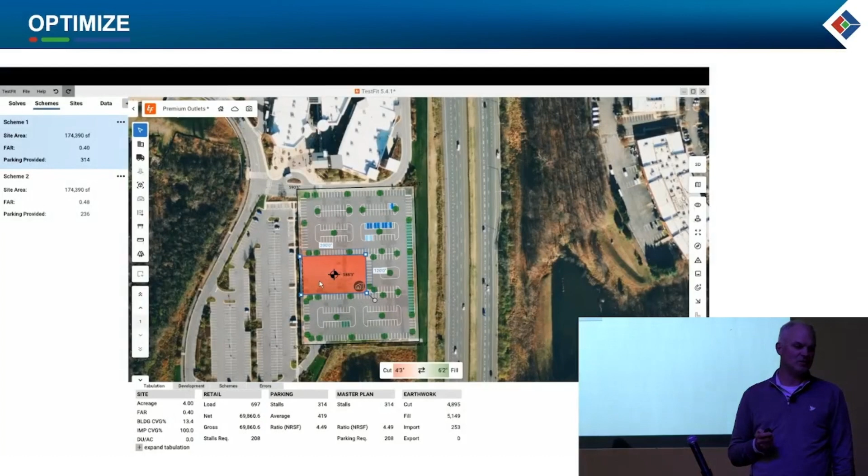So we're here to talk about automation in the design process, and I'm going to go through three phases of it. Early in a project we talk a lot about optimization and what are some of those tools we use. This is a tool we use for site planning, where you can move the building around early in a project and really start to explore in real time with the client and owner what the options are, what it looks like if we add another building to that site.

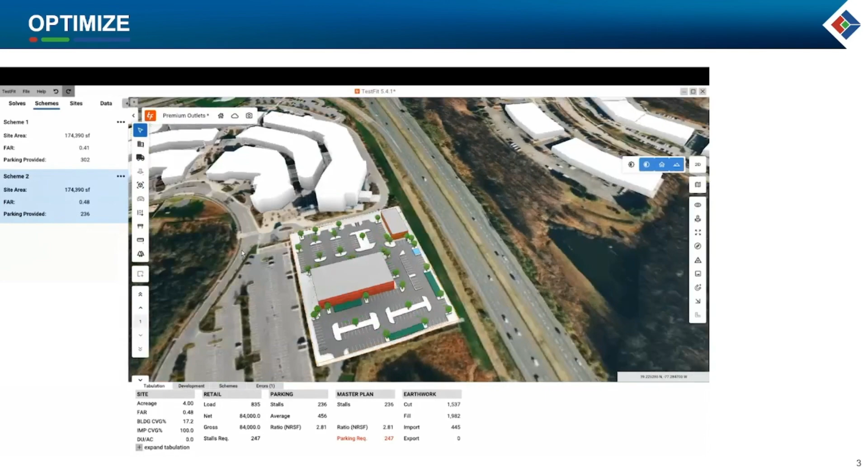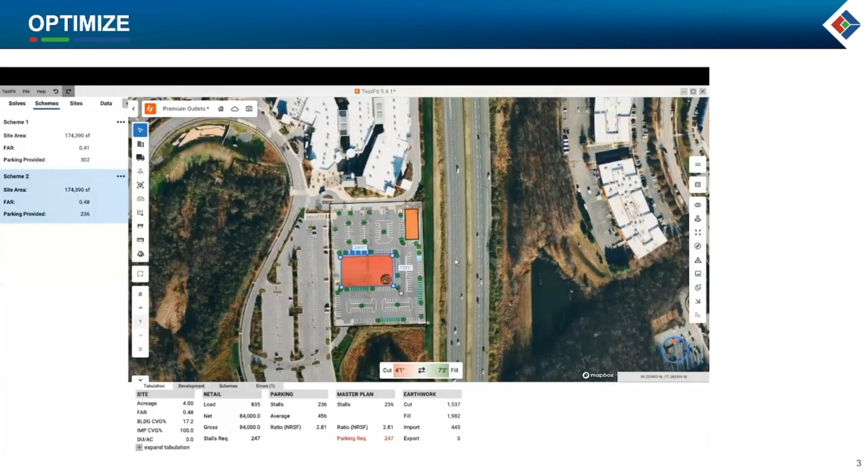I think the theme would be, with all the tools we have for automation, it's just easier for us now early on in the project to provide feedback and information to folks so we can make better decisions.

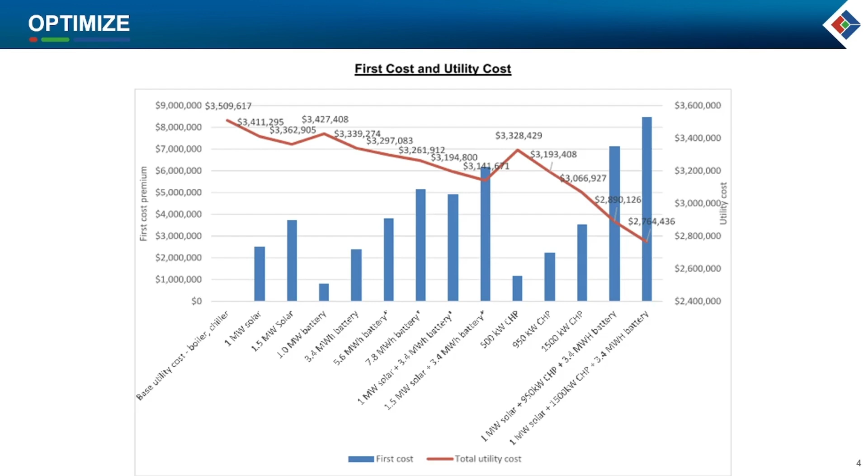This is another one. I tell people this is a less exciting automation tool, but this is when we look at energy sources for buildings or for a campus. This program takes it and puts a ton of different options together, thousands of different combinations, then gives you the 10 or 20 best. Sometimes it comes up with ones you might not have considered. It's not as nice to look at as some of the generative AI things, but it gives you a really good result, and once again it gives you that information early on to make good decisions.

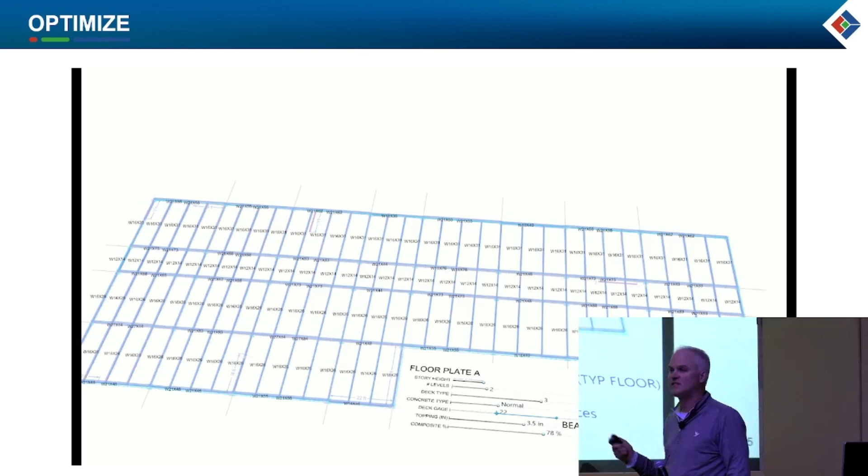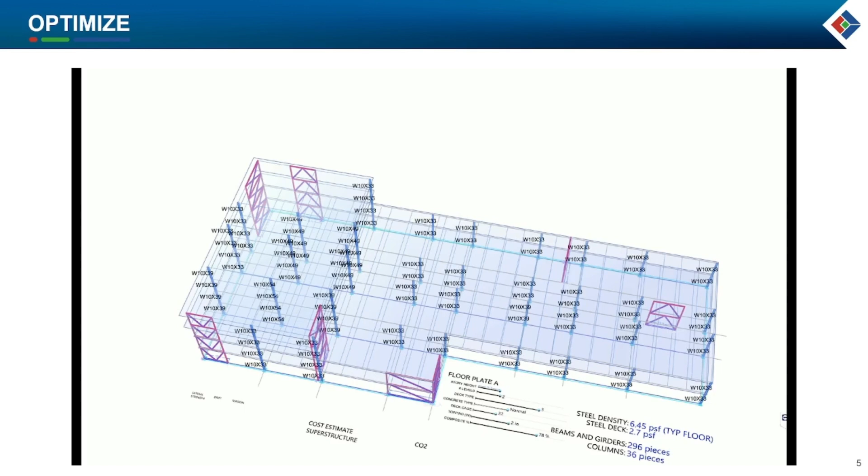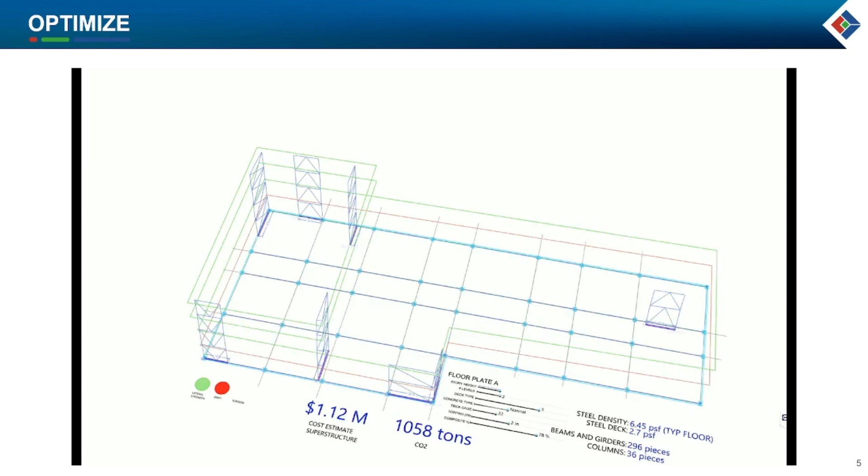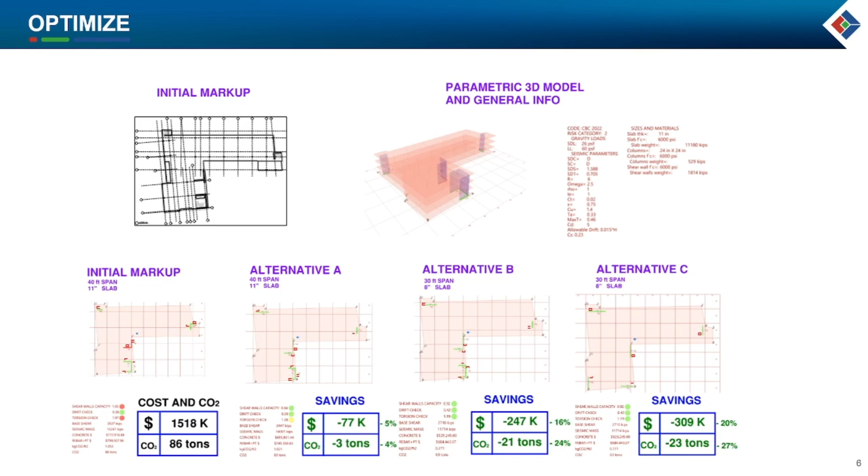From the structural side of things, as we get into projects there's a lot of questions on how do we arrange things, what's going to be the best and most optimized solution. As a theme, our industry—and I've been with IMEG for 25 years—I think a lot of times we think about design as experience; the design you provide is really based on your experience. What I think as a group is we're headed more toward data-driven design. You can't optimize your experiential design capabilities, but if we use data, then we can.

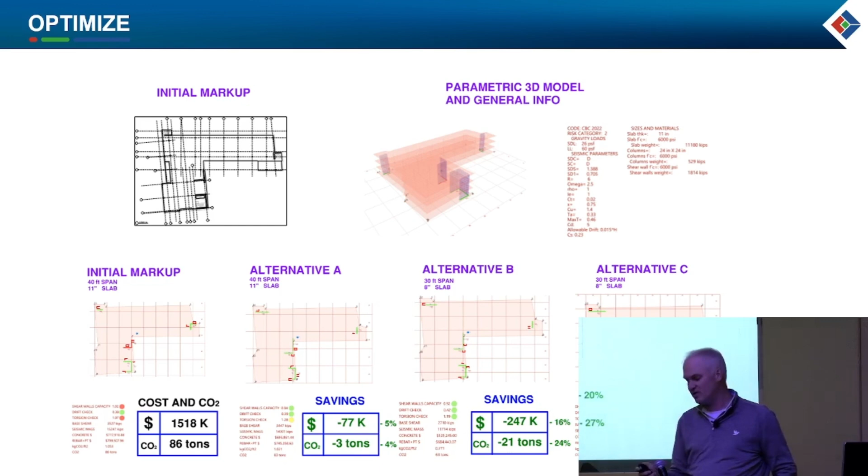The whole goal of that tool I showed before is to move things around and allow you to see what that impact is. But then ultimately it's to look at how much steel is in the building, how we can optimize that building and make good decisions. Some people are interested in cost, some are more interested in carbon, but they go together—if you use less material, it usually costs less, and there's also less of a carbon footprint. This is available on our website.

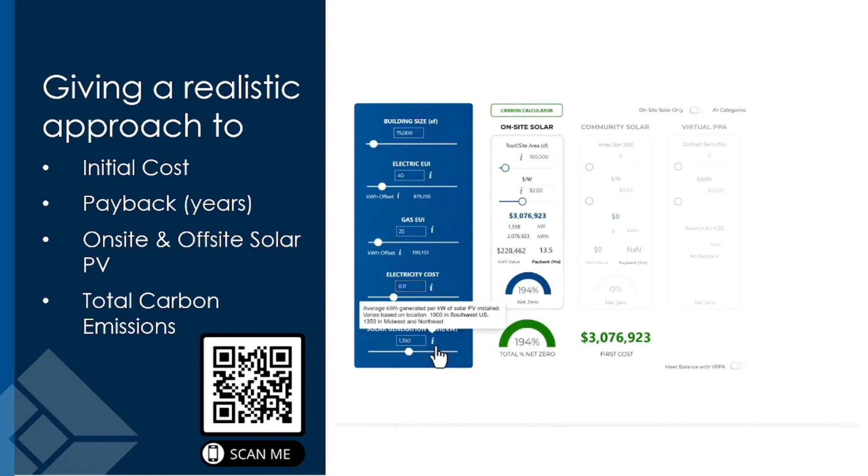We had a lot of people asking, I want my building to be net zero, so we put a tool together. It's simple, but you can put in the size of your building, and we give you some guidance on how much energy it might use. One of the questions that always comes up is, what if I put solar on my roof? Can I be net zero? This gives you that answer pretty quickly.

The other part of it is on the cost side of things. Usually we're working as part of a team, and so this allows us sliders and input. You can adjust that price and see how it impacts the solution.

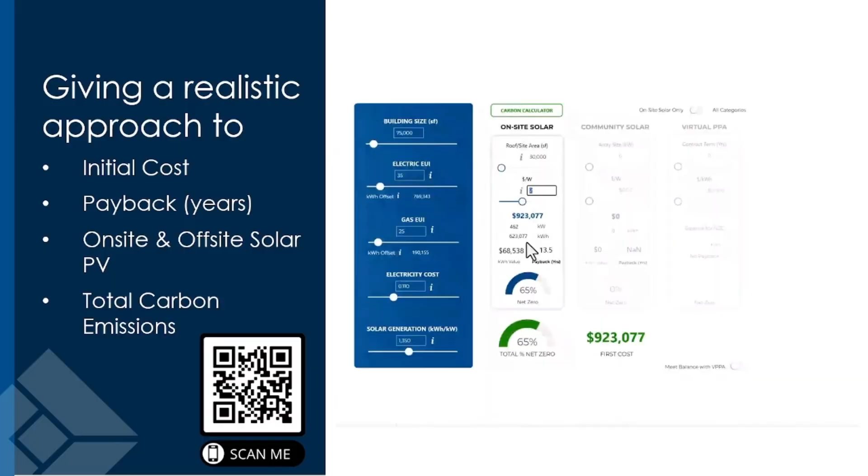The Inflation Reduction Act is another one of those tools where folks talk about it, but then when you get to their project, they want to know what this means in dollars for them. Once again, it's just a tool where we put some basic information on the systems they're considering, and we can give feedback on what money might be available, and maybe that changes the decision and direction they want to go.

So virtual reality, John and I had a little bit of a discussion on this. I think virtual reality, we've all seen it used on large projects, and if you used it five or more years ago, you may have had not a great experience. When we looked at virtual reality, we really look at it as, we want to use it on every project, all the time, every day, sort of a scenario. It's not something special, it's something we can do easily and all the time. And that's where it's really developed, the software, the hardware is really developed.

This is just an example of a project. It's a healthcare project. In this case, I think we had 65 clinicians that we put into the headsets so they could explore their patient room. Our goal for our team for 2024 was to have 1,000 virtual reality, augmented reality experiences. We ended up having 1,500 experiences for folks, so you get better, but also the reason we were able to do that was because there is just more automation. It's so much easier to take your model, put it into that environment, and then utilize it.

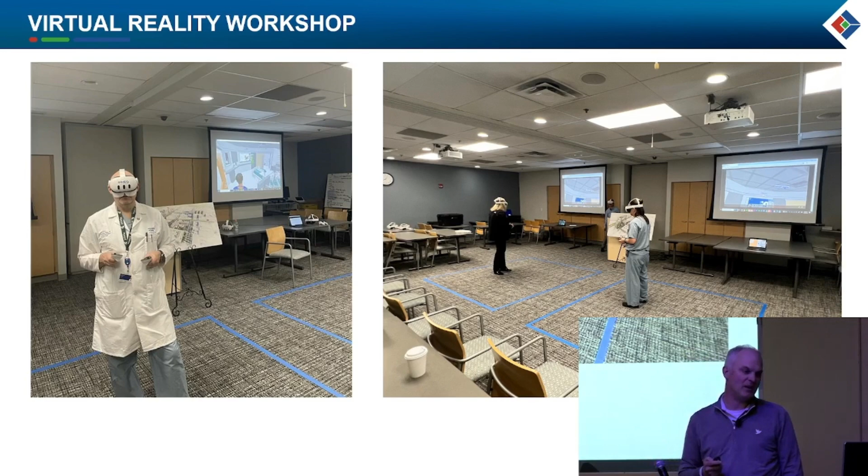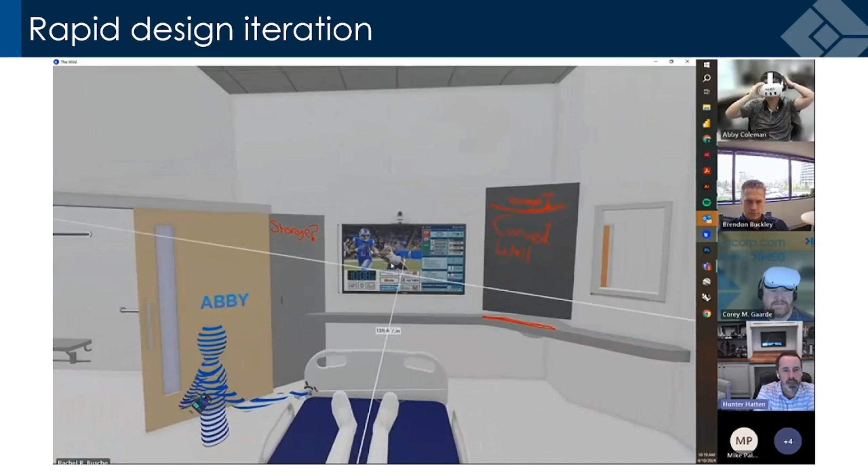When you think about all the data we have available to us, the 3D geometry of the building is the biggest data set for buildings that we do, and I don't think we always do a great job of visualizing that for people who aren't familiar, who aren't engineers. So this is an example where it's the classic question if you've done patient rooms: do you want one big monitor or do you want two smaller monitors?

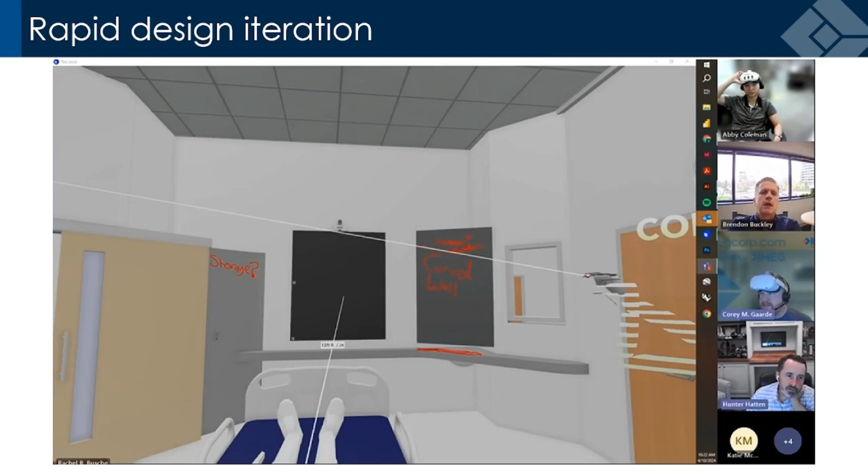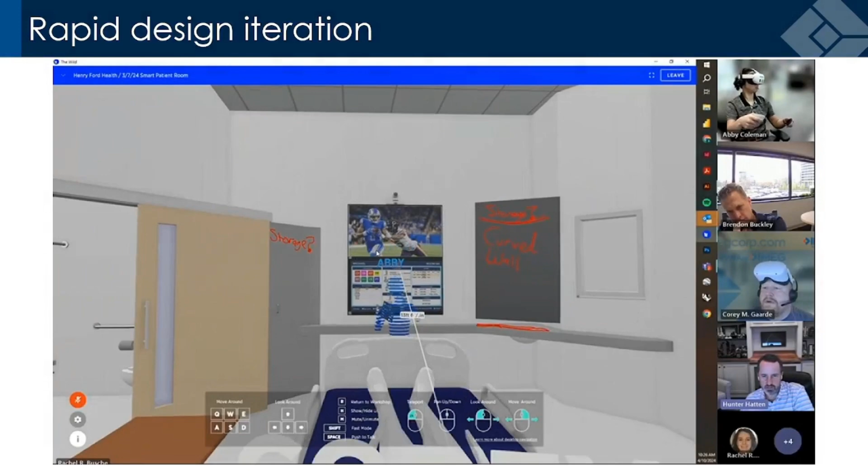So we got in a headset. Some people were on this virtually, some people were in the headset, and they basically put themselves right where the patient is. You look at one screen, and then you're able to change it and put in two and see what that looks like. I think that goes to the point that when we think about virtual reality, the other thing that really drove it for us was being able to move things in that virtual environment. When it's just a static environment, it's hard to really get the kind of engagement that we've been able to get with these tools.

I think people are skeptical, and even internal people are like, I've seen it, I've done it, I don't like it. But our clients really like it. This is just one example, but we talk about measuring success, and how do you measure if it was effective or not. We do surveys on all the folks that we put in the headsets, and it's just overwhelmingly a positive response.

Automation was in the title, so I have one simpler automation example of what we do. A lot of people think we're going to go to design and hit an easy button. I tell them, I think for the near future, we're probably going to hit the easier button. It's going to be easier, but it's not like you're going to hit a button and it's going to do all the design for you. That's not where we are. I think for the near future we're still going to need people to engage with AI and use it, and it's going to supplement them. Same with automation.

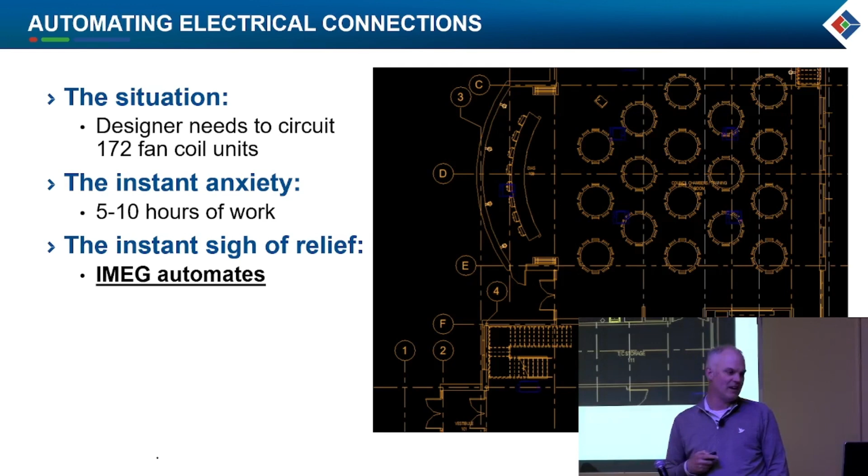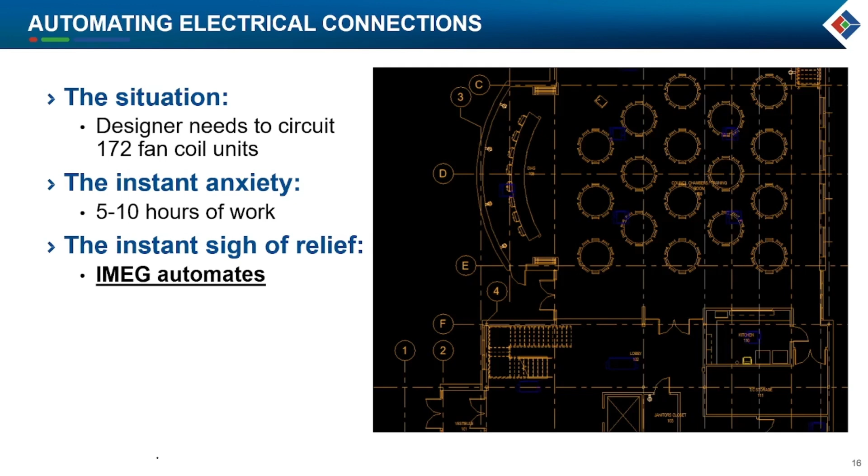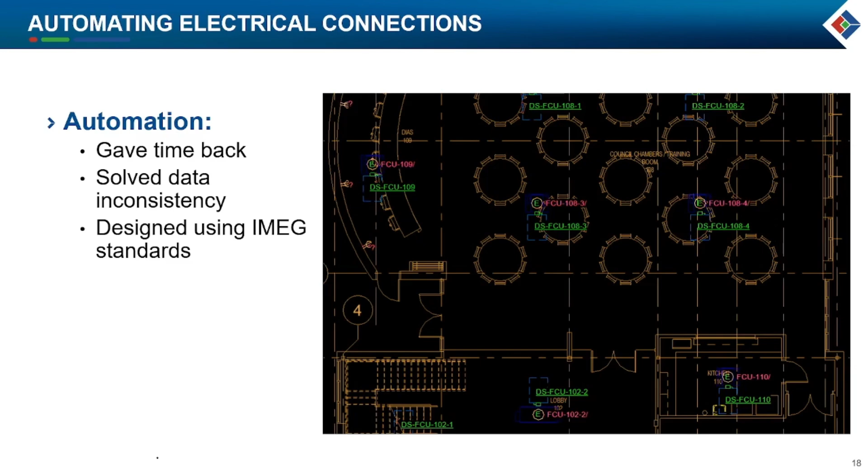But this is just one example. I know others have similar tools, but it's really leveraging data flow. The older style would have been everybody doing their own thing, mechanical does theirs, electrical does theirs. In this case, you've got 172 fan coil units that we need to circuit up, and the electrical engineers are thinking about how to do this well. Now we can hit a button and it basically puts all the stuff on the drawings, using one source of truth for what that equipment is. That's an example of the automation tools we're using to improve quality.

And it also improves the data provided in our documents. And then from a measurement standpoint, we talked about, in some of these previous sessions, how do you measure success? How do you know if what you're doing is making a difference?

We're engineers, and I think people have been pretty interested in, hey, what is the impact? I know on the panel it was about hours. So we use dollars and hours both, but for all the tools we have, we really look at what's the adoption rate, who's using them, and then we use that information to go help some of those teams that aren't using them as much as they could.

But really all the things that I showed you, we want to track and measure them. It's amazing how many times you get into discussions and people have tools putting things together, and you ask, well, how are you going to measure if this is successful or if you're making progress? A lot of times that leads to a really good discussion on what their success criteria is, because in order to measure that, you need to really understand what success looks like.

So with that, turn it over to John.

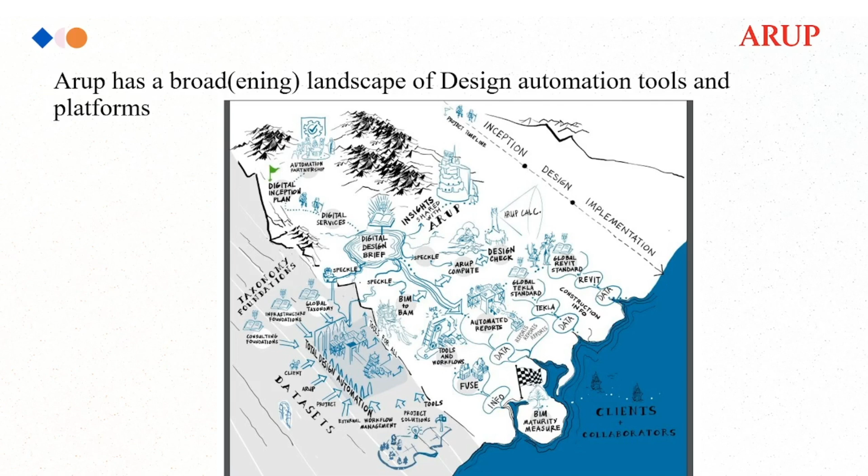There was a comment earlier today about the enabler of in-house developed software versus the use of commercial software, and I think that's an interesting area of tension. Even within a company like ours, there's a lot of value in creating your own software, because you have the agility to customize it versus the maintenance level of effort involved in commercial software.

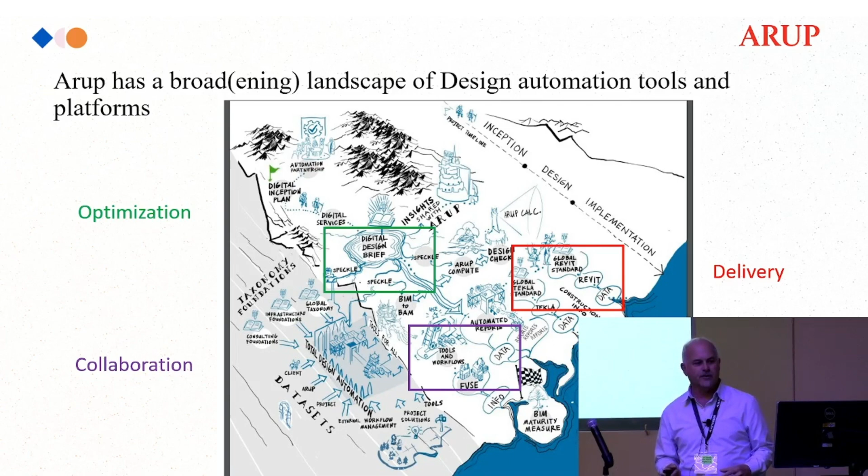So I wanted to focus on three key areas. I'm going to present three quick examples of projects. One is on the optimization side that Mike brought up, one is more on the delivery side, and one is really focused on better collaboration. The first project I'll talk about is one I've been personally involved in, in San Jose, California.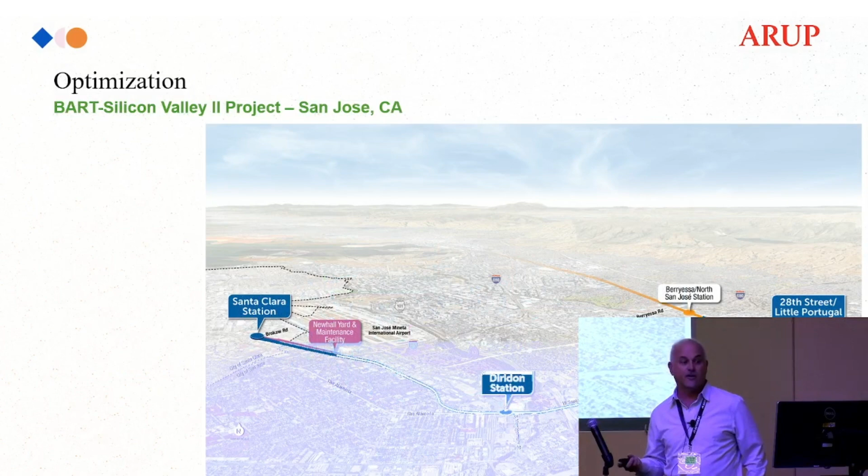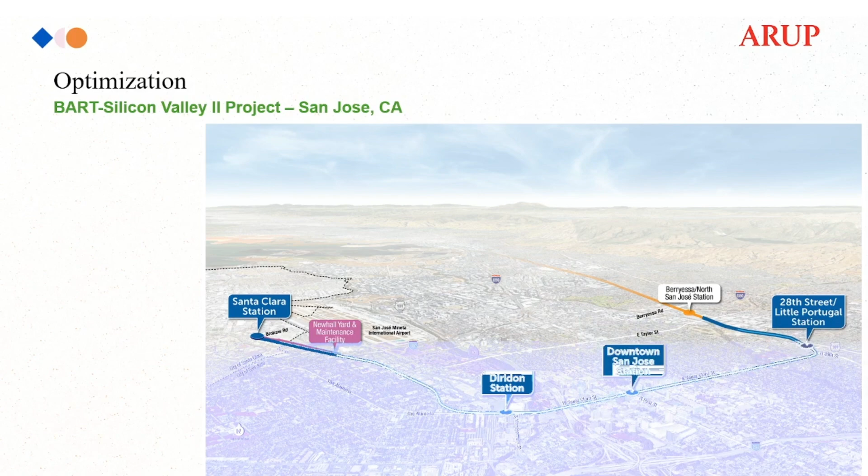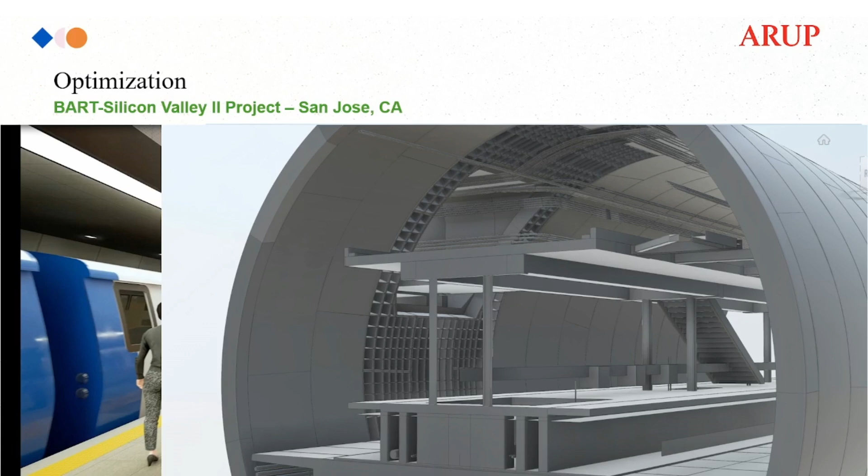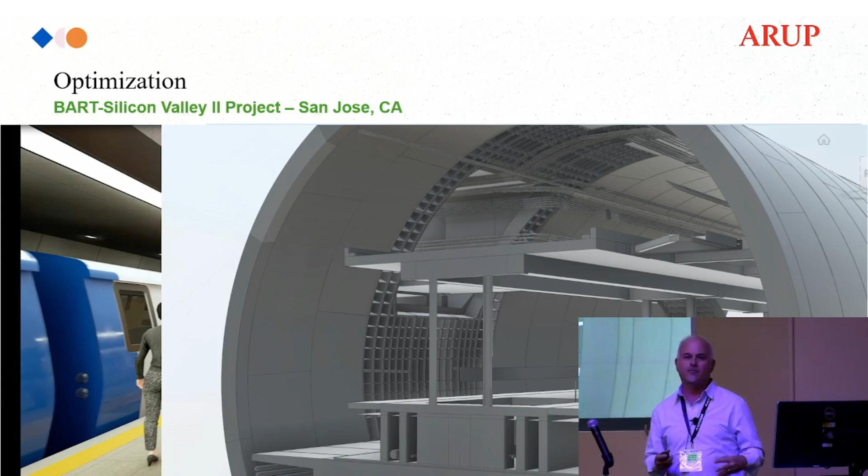Or actually I should say under it, where we're designing the extension to the BART transportation system with a 5-mile-long tunnel under Silicon Valley. It's a massive project, and when it's done it'll probably look something like this, but it's not—this is what the BIM model looks like now, at least in one of the stations. There's a lot of structure, and it's a 48-foot diameter tunnel, so the structure is actually converging on the principles of bridge design as well as basic platform structural design.

So what we looked at was using automation to enable fast prototyping from design to Revit production, because if we were able to do that, there would be a lot more flexibility and opportunity for design optioneering, and less time spent reproducing or updating the Revit model and the drawings.

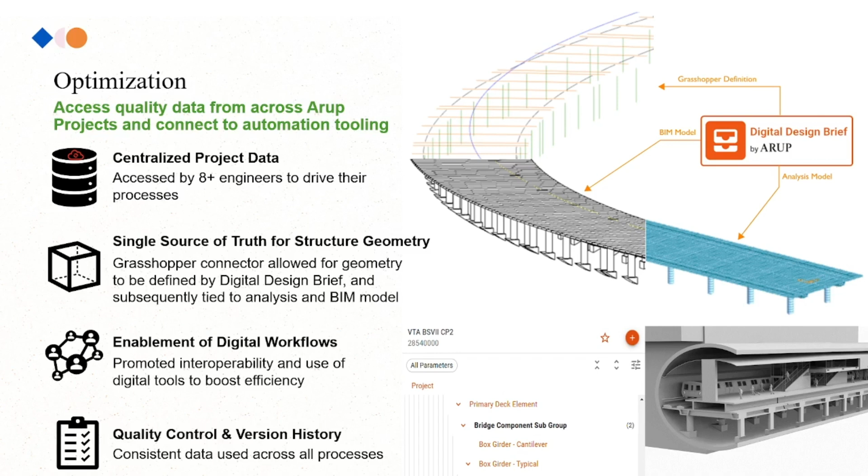Without getting into the number of tools, they're using Grasshopper, Python, a lot of Dynamo—there's a lot of this kind of stuff going on. Arup also has this tool called Digital Design Brief, which is basically an intelligent housing of input data that manages the quality and integrity of the data coming in, so you know you're not going to have the garbage in, garbage out problem.

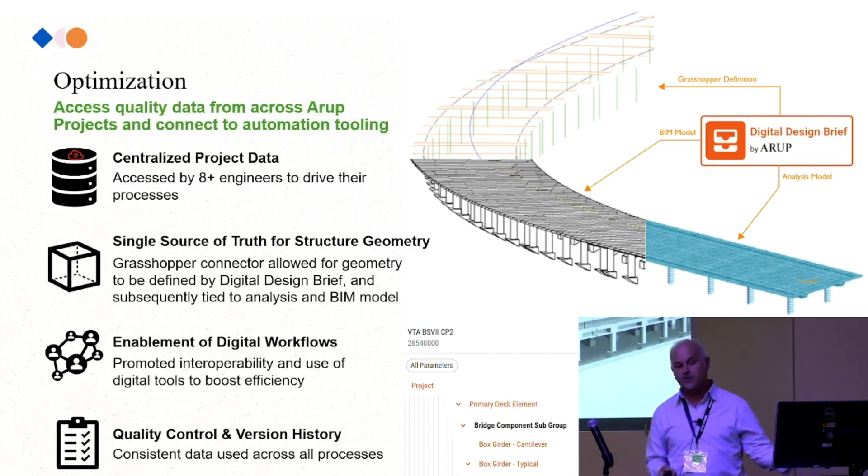This is ongoing, and it's been tremendously successful. I think it's reduced the hours for BIM production by hundreds and hundreds of hours, which doesn't mean there aren't a lot of hours spent on BIM production—because there are—but it's reduced a lot, especially on the structural side.

This next project is one I wasn't involved in, but I know the people who were—this is related to the Allegiant Stadium project in Las Vegas. This was a real collaborative effort with Trimble, and the main tools here are Tekla and Revit, but the innovation is all around the combined use of Tekla and Revit.

They have an in-house tool they call the repo—similar to Speckle, I think, but kind of a hybrid of a bunch of things—basically a data repository that enables real-time transformation from Tekla to Revit, so Tekla can be used for steel fabrication and Revit can be used for the drawings produced for the contractors.

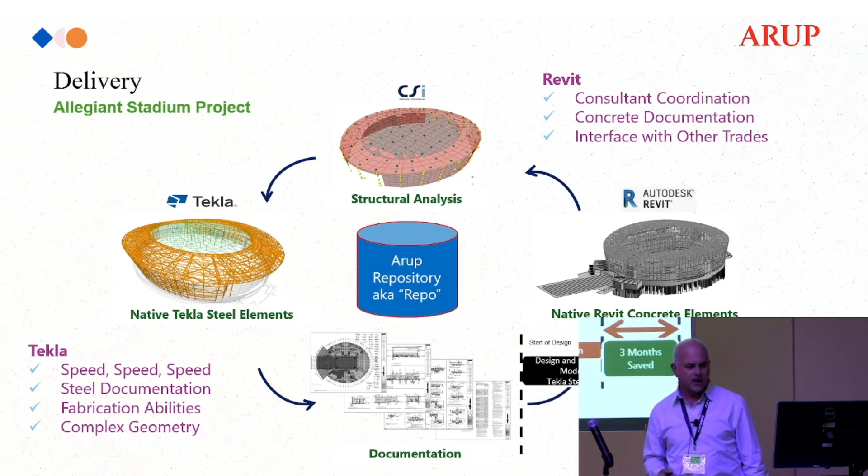This was very successful—they saved about 3 months on the project, at least on the structural design deliverable. So that's really around the deliverable—good use of automation.

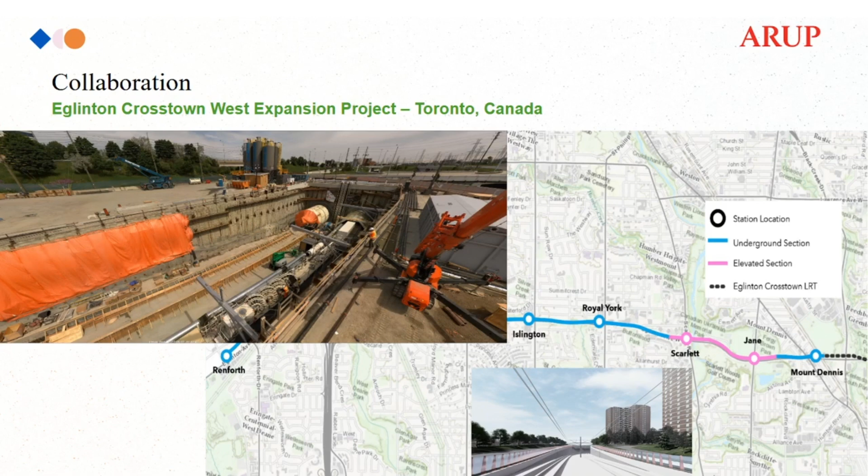The last example is a little different. It's in Toronto—a huge rail expansion project called the Eglinton Expansion Project, covering a lot of the route around Toronto, including tunnels, light rail, and subway stations. It's a long-term deal, and one of the valuable tools that's come out of this is an in-house Arup software called Fuse, which is basically an integrator.

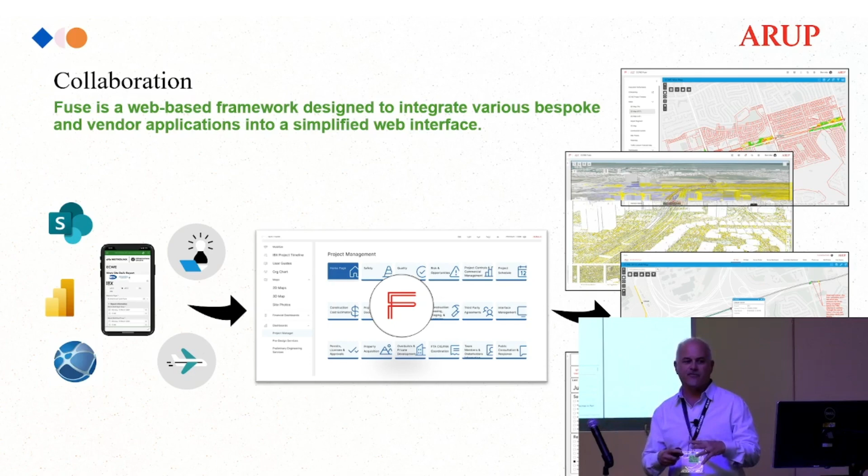It uses FME as an under-the-hood integrator for all these databases, bringing all this information into a single website, and it layers onto Esri for the mapping and geospatial data. So you have your geospatial data, with all kinds of data layered onto it, including design data. It links to Autodesk Construction Cloud, and then to Power BI, so dashboards are produced that monitor the progress of the job in both design and construction. It's very easy and instantly accessible, and it's been a huge value on this project. The clients are really keen on this because it's that single source of truth concept, enabling everybody to access the authentic, updated information in the same place, same time. That's the end of my presentation.

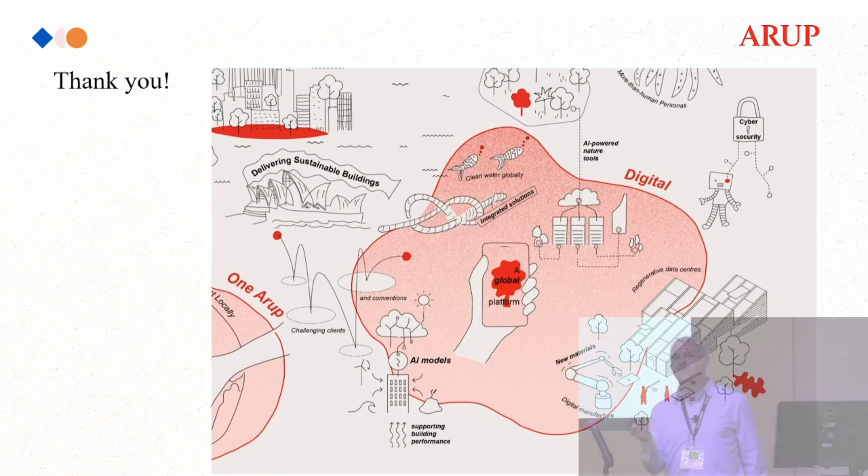I'd say the journey is on its way, but I'm still amazed at how difficult it is to do all this stuff. Automation, scripting, and BIM - you'd think it'd be less complex, but it's not. So we were going to open it up to some questions, and maybe our presentation has prompted some ideas and thoughts.

Did you want to use this, or are you good? I'm good, I'm good. Okay. All right, let's open it up for any questions.